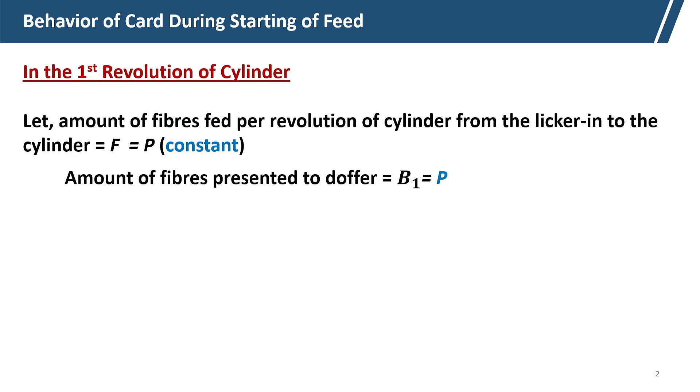Now, the amount of fiber transferred to the doffer in the first cycle, denoted by C1, is definitely lower than B1 or P, by the factor gamma. So B1 multiplied by gamma is the amount of fiber transferred to the doffer, and gamma is called the transfer coefficient, and gamma is always less than 1 - 100% of the fiber will not get transmitted. So it is equal to P gamma.

Now, gamma is the transfer coefficient, and the amount of fiber retained by the cylinder is B dash 1 in the first cycle. So this is the fiber coming, P fiber is coming, the doffer is taking P gamma, and the remaining fiber, P minus P gamma, is B dash 1. This fiber is actually retained by the cylinder.

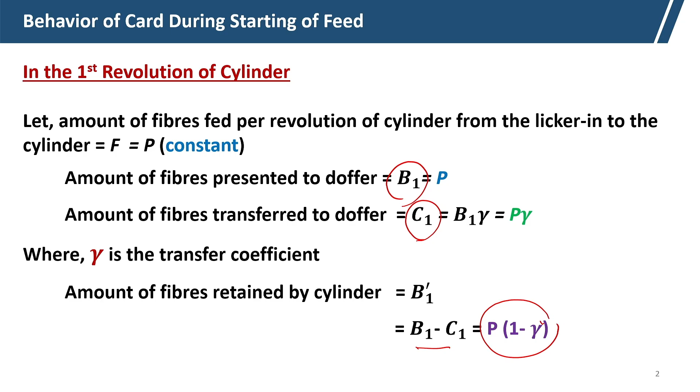Now coming to the next revolution. In the second revolution of the cylinder, what happens? In addition, the additional P is coming to the cylinder, because the production rate is P, and the retained fiber is there, B dash 1, from the first cycle. This will be added and again presented to the doffer.

So we can predict the third revolution. Let us see what we are getting there. In addition to P, the retained fiber from the second revolution, that is B dash 2, will also be presented to the doffer. So this fiber will be again presented to the doffer, and what we will be getting? So we will just add P plus B dash 2. So B dash 2, we have got this from the earlier relationship.

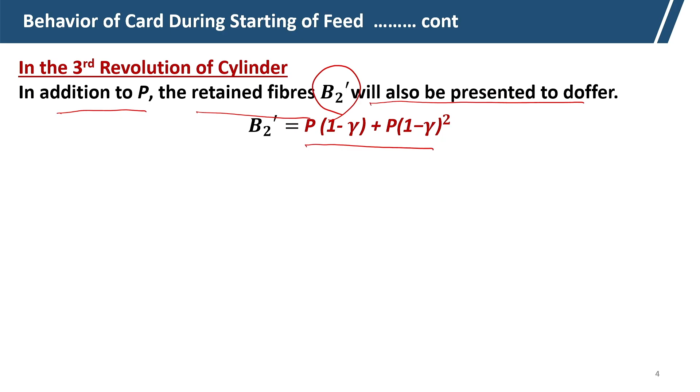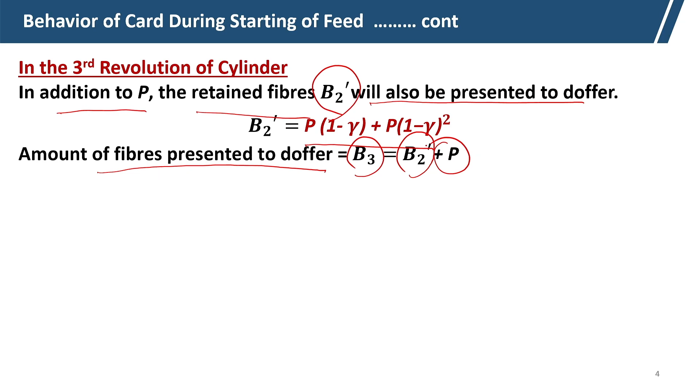If we get this, the amount of fibers presented to the doffer is B3, which is B dash 2 plus P. So this total fiber B3 is presented to the doffer. Let us get this: P plus this B dash 2. So these fibers are presented.

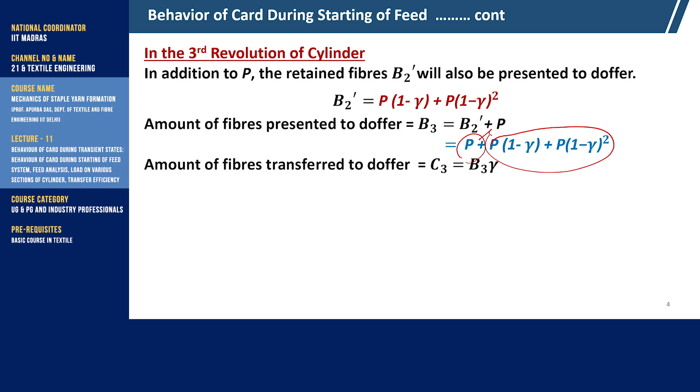Now the amount of fibers transferred to the doffer, which is C3, is nothing but B3 multiplied by gamma. Again, if we multiply this with gamma, we get this equation, P gamma, multiplying every part with gamma, and by rearranging, what we are getting is P multiplied by 1 minus 1 minus gamma whole cube. This is the relationship we get for the third revolution.

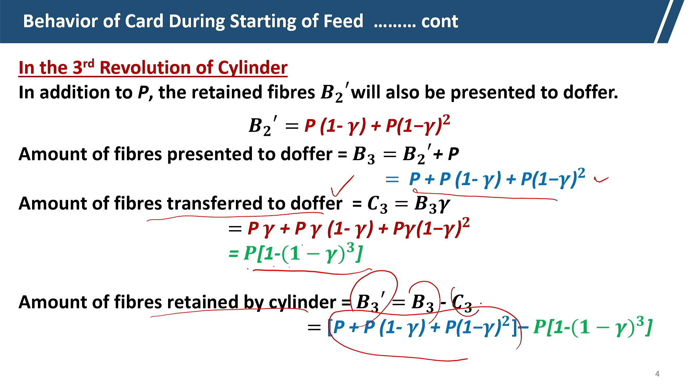So, this fiber is transferred to the doffer. Now, what we are getting, the fibers remaining in the cylinder at the third revolution will be B3 minus C3. B3 is presented and C3 fiber is taken away. So, B3 minus C3 will be this B3 and this one is C3.

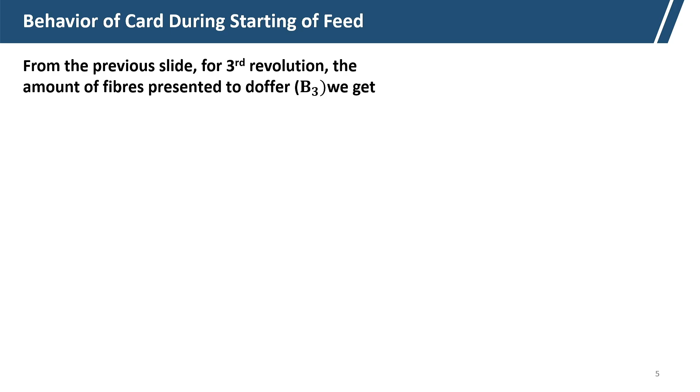So now we get, from the previous slide, the third revolution, the amount of fibers present to the doffer B3, we get this.

And now, for the generalized equation for the nth revolution, the amount of fibers presented to the doffer, that is Bn. So for the third revolution it is B3, so for nth revolution it is Bn.

Now, we can get the relationship here. Bn will be P plus 1 minus gamma, P plus 1 minus gamma squared. This series will continue, and ultimately it will be n minus 1. So for the third cycle it is n3 minus 1, up to 3 minus 1. So the power will be n minus 1, so here it is n minus 1.

So this is the generalized form for the fibers presented to the doffer at the nth cycle, because now the saturation is not reached. So during saturation time it is there, and when the saturation is reached, that means Bn will be equal to Bn minus 1. At that condition the saturation is reached.

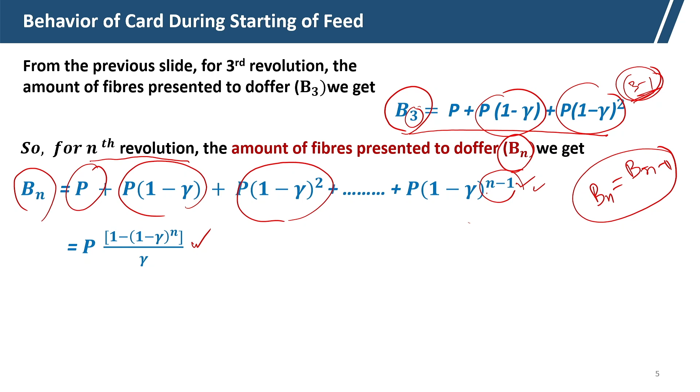Now, if we add this series, using this series we will get this value: P multiplied by 1 minus gamma to the power n, divided by gamma. So this is the relationship we get for Bn, that is the amount of fiber presented during the starting after the nth revolution.

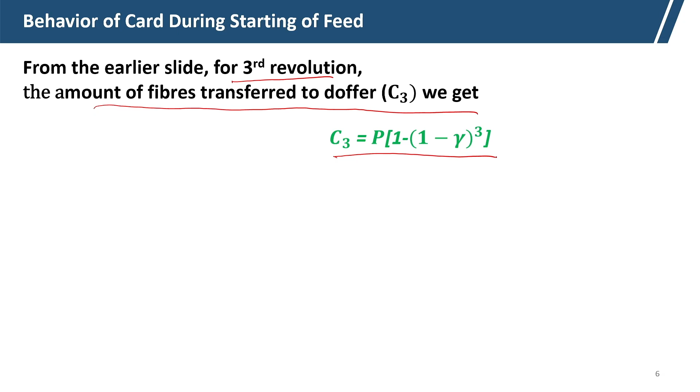And from the earlier slides of the third revolution, the amount of fibers transferred to the doffer, we are getting C3, amount of fiber transferred to the doffer, is P multiplied by 1 minus gamma cubed. So from that relationship we can calculate Cn also. So the amount of fibers transferred to the doffer, Cn, at the nth revolution we will get, so in place of 3 we can use n here, so Cn is there.

So, amount of fiber presented to the doffer Bn is this, and amount of fiber presented... so for the nth revolution, amount of fibers transferred to the doffer will be P. So Bn multiplied by gamma, so P multiplied by 1 minus this. So amount of fibers presented to the doffer Bn, and amount of fiber transferred to the doffer, will be multiplied by gamma. This is the thing.

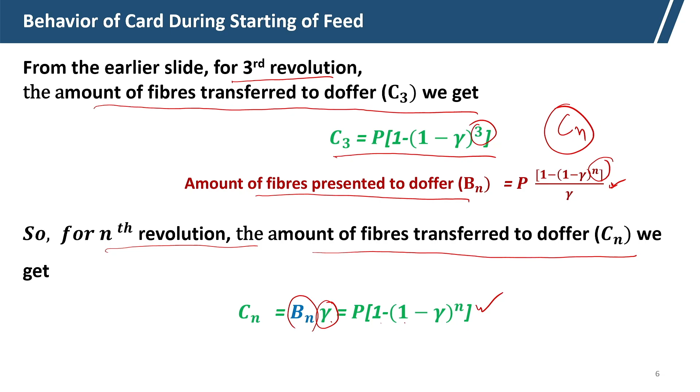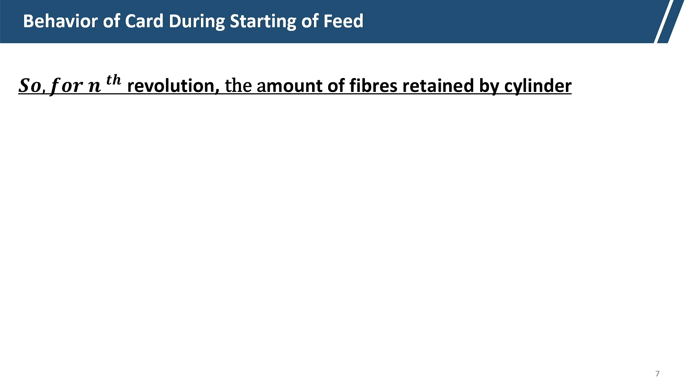Now, amount of fiber retained by the cylinder will be Bn minus Cn. So amount of fibers retained by the cylinder after the nth revolution, that we can see here. So Bn minus Cn, that is B-dash n, will be Bn minus Cn, this is Bn and here is Cn, this is the relationship. So at this condition, now we can simplify, rearranging this equation we get this equation, which is P multiplied by 1 minus gamma to the power n, multiplied by 1 by gamma minus 1. So just by rearranging this equation, we are getting the amount of fiber retained by the cylinder.

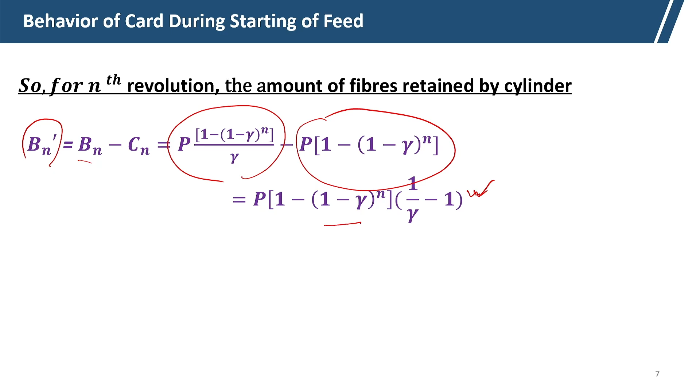So when do we get the steady state level? Steady state level, we get when n is very high, after a certain time. So let us assume n tends to infinity. So at that stage, it will get the steady state condition, n equal to infinity.

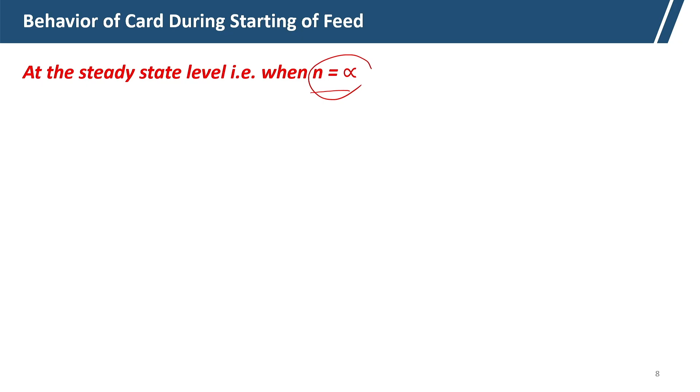So here for B infinite, that is amount of fiber presented to the doffer, B infinite, it will be equal to P into 1 minus 1 minus gamma to the power infinite. So ultimately we will find this becomes 1, this will become 0 because gamma is less than 1. So at that power infinite, this part will become 0, so ultimately this will be P by gamma.

So at that stage, that is the fiber presented to the doffer, and this is C infinite, that means C infinite is equal to C, that is the fiber taken by the doffer, that is fiber transferred to the doffer will be P by gamma multiplied by gamma. That is because C is B into gamma, so that is why it becomes P. That means, at the steady state condition, whatever fiber is fed is transferred to the doffer.

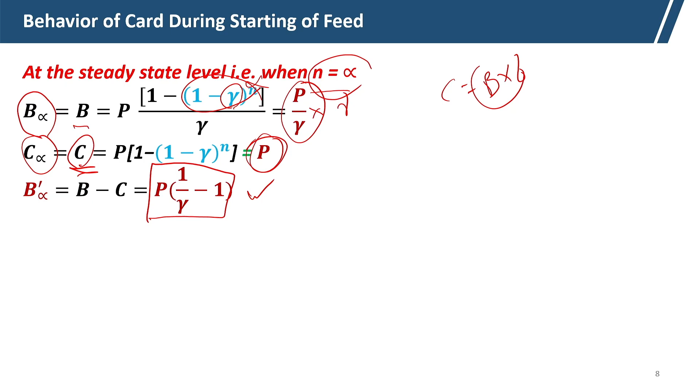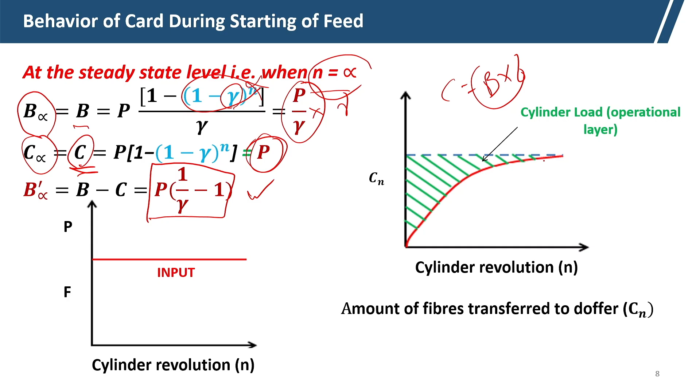So, the input of the cylinder revolution is constant which is P, and we can see the cylinder load gradually increases and it basically reaches a particular level. So, cylinder load in the operation layer gradually increases.

So, from there we can get the value of the cylinder load at any stage, at any number of this cylinder revolution. So, amount of fiber transferred to the doffer, Cn, is increasing with the cylinder revolution and it reaches the steady state condition. So, operation layer cylinder load is shown by the hatched line zone.

Now, in case of opposite, what happens when we stop the feed: cylinder is loaded and it is at steady state condition, suddenly we stop the feeding. Now, what will happen during that time? Because it is a transient state, as I mentioned initially when we start feeding it is transient state and loading increases, but when we stop feeding it is again transient state, but the cylinder loading gradually reduces.

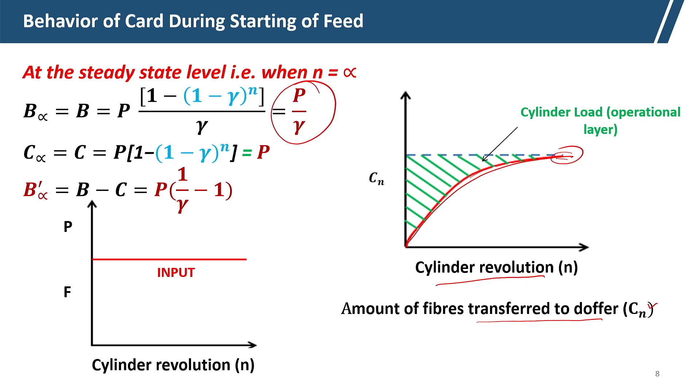Now, let us say for the first revolution again the quantity of material on the cylinder is P by gamma, same as we have seen in steady state condition. Initially, at the starting portion, the cylinder load was 0, there was no load, but here at the steady state condition, this is the cylinder load which is presented to the doffer, that is P by gamma, and that will actually continue. When you stop the feeding, the quantity of material on the cylinder is B equal to P by gamma.

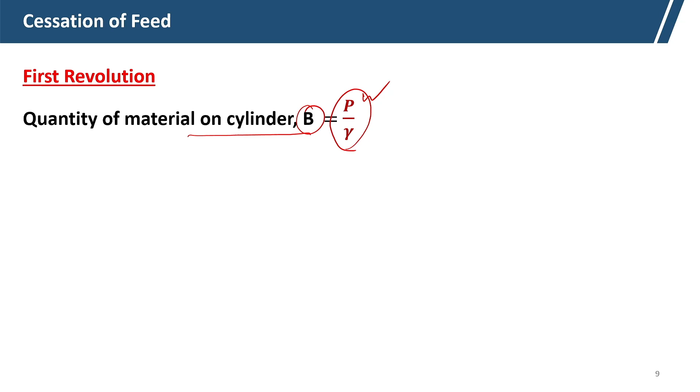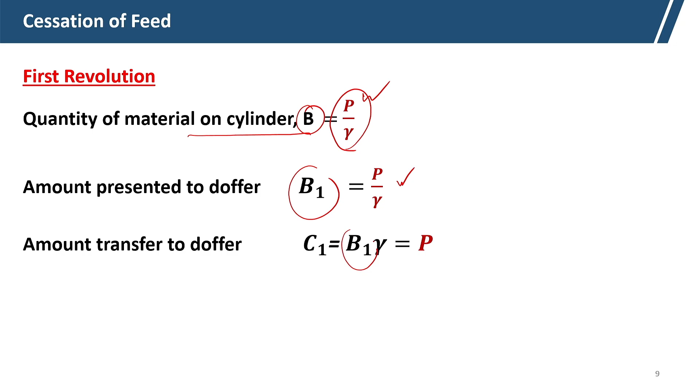Now, the amount of fibers presented to the doffer at the first revolution after the feed is stopped is the same, P by gamma. Now, the fibers which will be taken away by the doffer at the first revolution is equal to B1 into gamma, C1, which is nothing but P, and the amount of fibers retained by the cylinder will be B1 dash, B1 minus C1, as we have seen earlier. This is the first condition, first revolution after cessation.

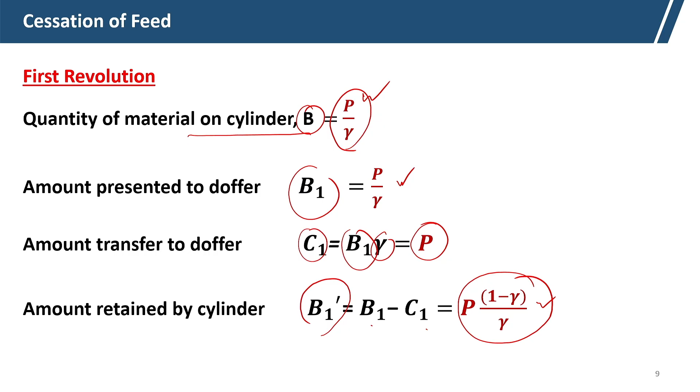Now, in the next cycle, what will happen? The cylinder will have this load only, because there is no additional feed. So, in the earlier case we kept on adding the P value. Here there is no additional fiber because the feed has been stopped.

For the second revolution, the amount of fiber presented to the doffer, B2, equals the amount of fibers retained in the first revolution, because there is no additional feed. So, it will remain the same. So, B2 and B1 dash will remain same.

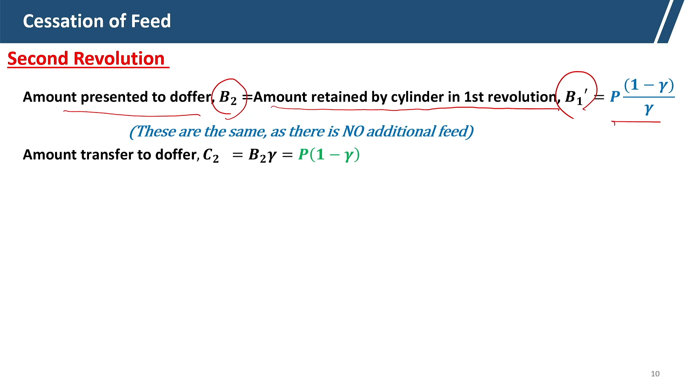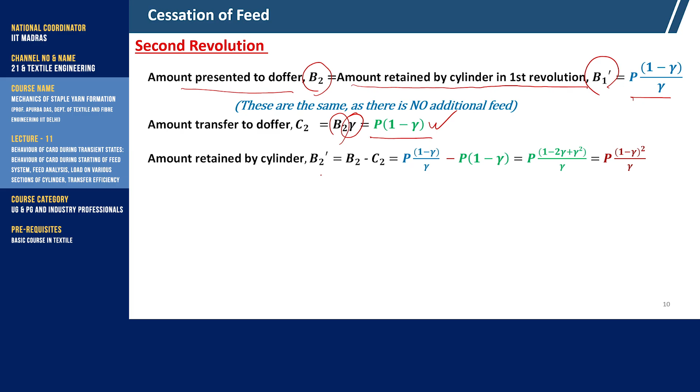So, the amount of fibers transferred to the doffer will be B2 multiplied by gamma, that is C2, and the amount of fibers retained by the cylinder, B2 dash, will be B2 minus C2. So, this is what we are getting.

So, we can just rearrange this equation, P multiplied by 1 minus gamma square, by gamma.

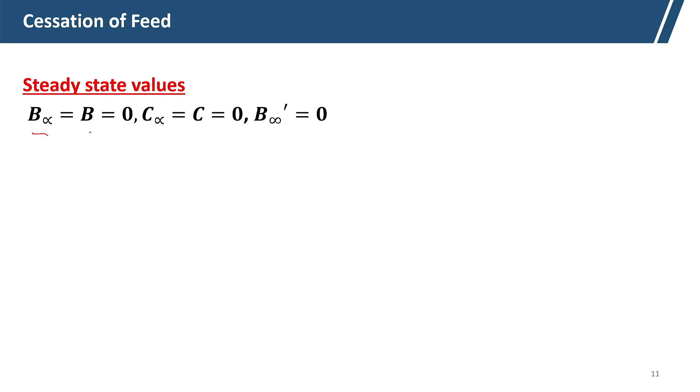And B dash infinity, so if we stop the machine and run it for a long time, the load on the cylinder will be 0, because the cylinder will be totally cleaned theoretically, and then there won't be any fiber transfer, this will also be 0. So that we can achieve, we can get from this equation.

So as the number of cycles increases, these values keep on reducing. In case at the starting point, the values keep on increasing; here the values keep on reducing.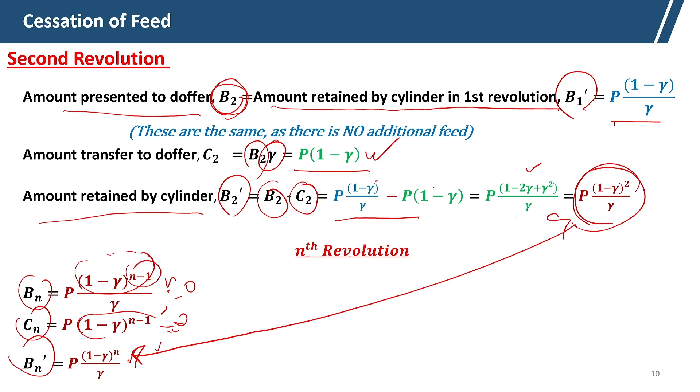We can see here, with the cylinder revolution at cessation, this is the production. We stopped the feeding, and gradually the cylinder load reduces and finally becomes 0.

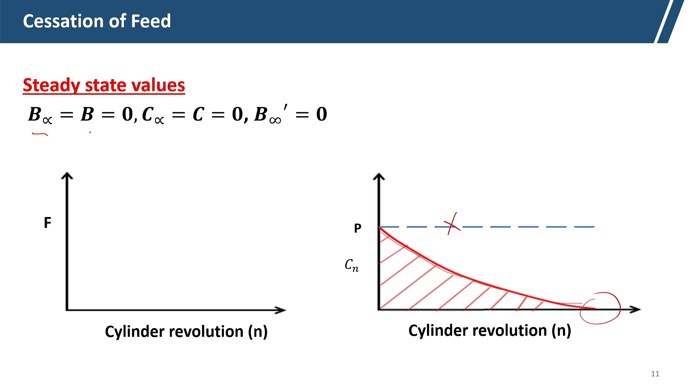Now we will discuss the cylinder load at different sections. Cylinder loading is very important, it affects the quality of the product, so we must know the cylinder loading at different total loading, and also at different sections. The cylinder is now divided into different sections.

We are dividing it into different segments. Now you can see here the cylinder is divided into different segments. This is the Licker-in, here is the Doffer. Between Doffer and flat, within the zone alpha 1, this is zone 1. In the carding zone between flat and cylinder, alpha 2 is the second zone.

Between the flat and Licker-in, this is zone 3. And in this zone, the remaining layer of fibers are there, which is within the cylinder. So Q2 is the fiber layer distributed over the entire periphery of the cylinder.

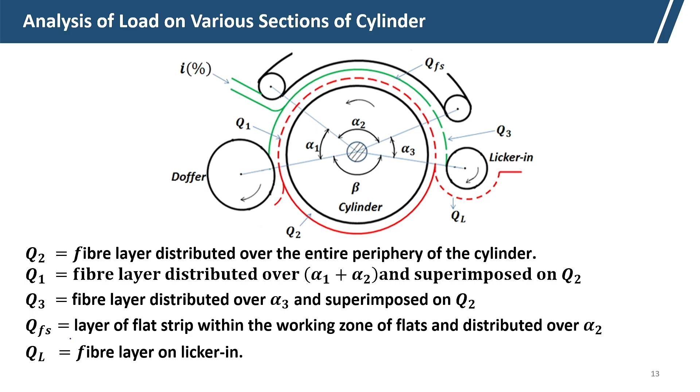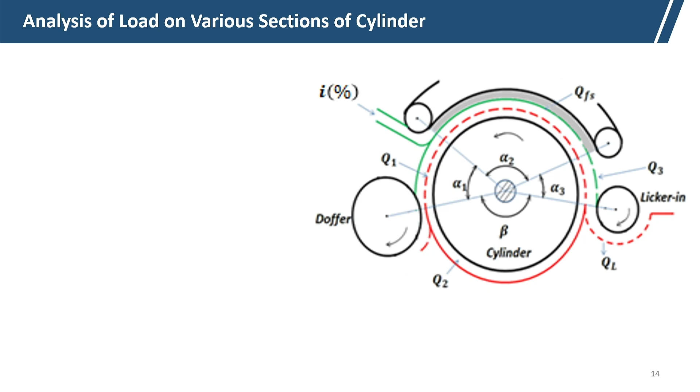Now, one by one we will do this. We will be interested in this first one, which is shown by the gray shading. So the area of interest is shown by the gray shading: weight of flat strip in the working zone, QFS, as we have. So this we will first calculate. Let us see what happens.

So radius of cylinder is RC, it is in meter. Now metric count of flat strip - here what is the metric count? It is in meter per gram; metric count is actually the indirect count. So meter per gram, it is NFS, metric count of the flat strip, that is the layer which we know - whatever fiber layer is there, that hank is NFS. If we know NFS, then the quantity we can calculate.

So quantity is that we know the cylinder radius and alpha 2 is the angle. So the total length - alpha 2 is the angle not in degrees, it is in radian. Alpha 2 multiplied by RC is the total length. If we know the length here, divided by the metric hank. So RC is given in meter. So RC multiplied by alpha 2 is the total length in meter, and if we divide this by NFS, that is the metric count of flat strip, we can calculate the total flat strip present.

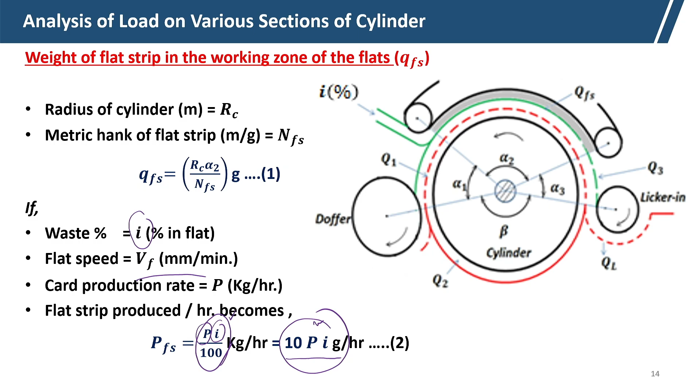Now, weight of flat strip in working zone is QFS. So we have seen the flat strip production is 10 P i gram per hour. So length of flat strip produced per hour - what is the length? So we know the flat speed, Vf is the flat speed, by 60 divided by 1000, so it should be meter per hour. Vf is the flat speed in millimeter per minute.

So from there we can calculate the flat length of flat strip, and using equation 2 and 3, we can calculate the hank of strip. So earlier the flat hank was unknown, but from the total flat strip and the flat speed, we can calculate the flat hank. So NFS can be calculated by 6 Vf divided by 1000 P i.

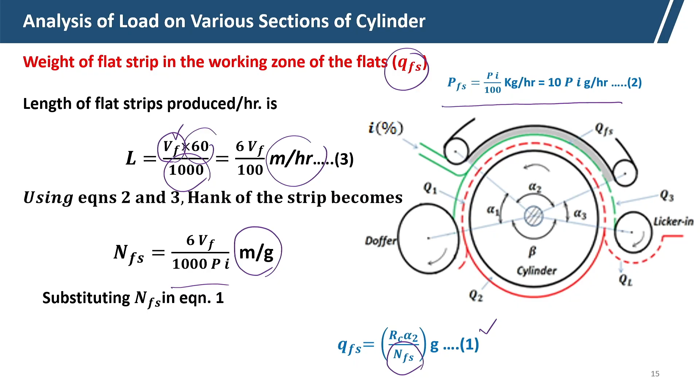So it is in meter per gram - meter per gram, that is the NFS. So this NFS we can use in the earlier equation, substituting this equation, and we get equation 1, where NFS was unknown. So NFS we can calculate from the production rate and speed of the flat and the flat strip.

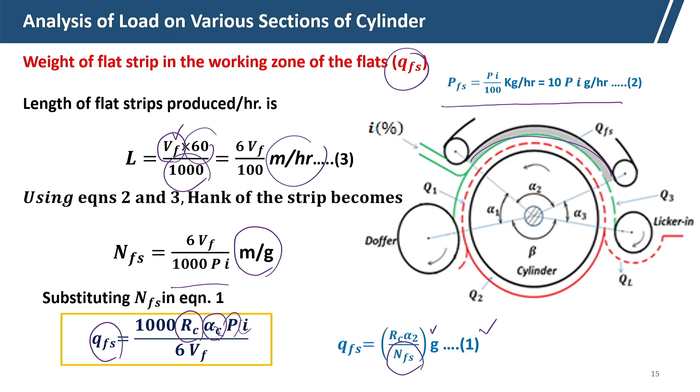So if we substitute this, we get the QFS value. QFS means the total flat strip load in the working zone will be - substituting, we get 1000, RC is the radius of the cylinder, alpha 2 will be the zone, and Pi divided by 6 Vf. That way we can calculate the flat load in the working zone. So here the flat metric hank was calculated from the flat strip and the production rate.

Now coming to the next zone, which is the weight of fiber layer on the cylinder section between flat and doffer. This zone is shown by the gray shaded zone. What is the weight of fiber in that zone? It is Q alpha 1.

What is Q alpha 1? That is RC multiplied by alpha 1 and N alpha 1. What is N alpha 1? N alpha 1 is the hank of fiber layer in that zone. RC alpha 1 is the arc length, where alpha 1 is the angle in radian and RC is the radius of the cylinder.

So we can calculate the arc length. Let the metric hank of the layer in layer Q1 be N1, and total layer N1 is the layer in that zone only, plus total layer. So N1 is Q1 plus Q2 layer, if we include Q2 layer which is inside throughout the cylinder zone. So Q1 plus Q2 will be N alpha 1, that is the metric count of the metric hank of this layer.

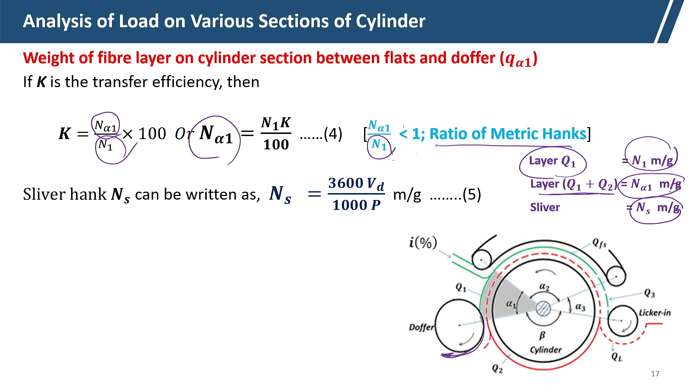So the sliver hank Ns can be written as 3600 Vd by 1000 into P. That is the sliver hank we can calculate from the production rate and delivery speed. Vd is the delivery speed of the doffer, and P is the rate of production in kg per hour, and from there we can rearrange this equation.

So this is in meters per minute. From there we can calculate that Vd is the surface speed of the doffer in meters per second, and P is the production rate in kg per hour. Ns can be written as N1 by Vd by Vc, or N1 equal to Ns into Vc by Vd. That way we can calculate the production rate and Ns and N1.

So weight of fiber layer on cylinder section between flat and doffer, Q1, is then obtained by substituting Ns from equation 5 and using equation 6. Using this, N1 we can calculate: N1 is equal to 3.6 by Vc by P. That is N1, which is the layer Q1, so this is the hank of layer Q1. We can calculate the hank of layer Q1.

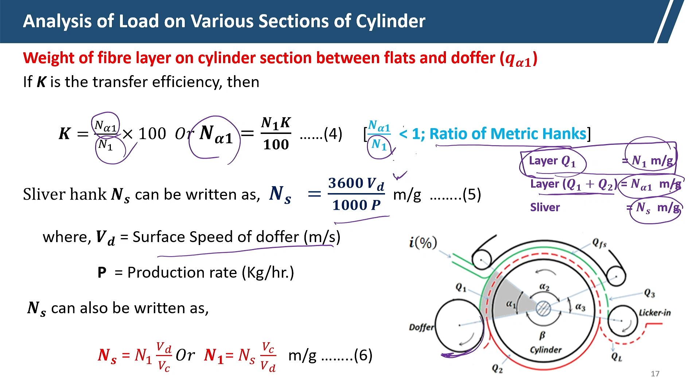From this N alpha 1, we can get N the Q, and from here we can calculate Q alpha 1. Q alpha 1 becomes 100 Rc alpha 1 P divided by 3.6 multiplied by Vc and K. So we can see Q alpha 1 from the earlier relationship. These are the relationships here, and we can get Q alpha 1.

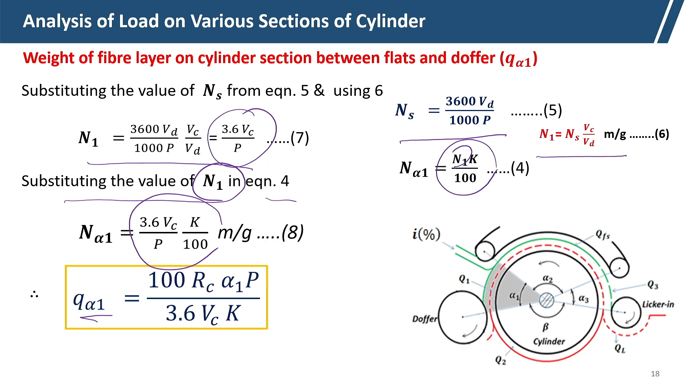So here RC is known, VC is known, K is known, K we can calculate. So everything is known, so we can calculate the quantity of fiber present in the zone alpha 1.

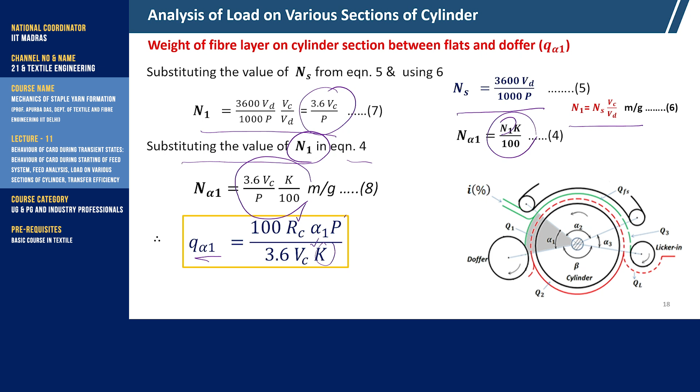Now we will see the quantity in the cylinder flat zone. So quantity of fiber layer on cylinder under flat zone, this is the area, and we will calculate in the similar way, exactly in the similar way. Here layer Q1 and Q2 are present on the section beside the fiber layer QFS. Q1 and Q2 are present beside the layer QFS. QFS we have already measured.

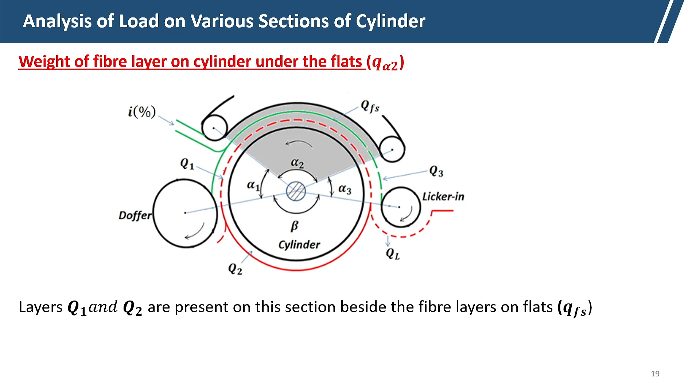So what we are interested in? We are interested in the fiber layer on the cylinder itself, now only on the cylinder. So combined hank of Q1 and Q2 becomes N alpha 1, which is equal to N alpha 2, because this fiber is coming here in this zone. N alpha 2 we have already measured. So N alpha 1 and N alpha 2 will be same, because this layer is coming to this alpha 1 zone, same between flat and doffer zone.

So N alpha 1 we have already calculated earlier. N alpha 1 is the metric count between this zone, which is equal to, so Q alpha 2 equal to RC alpha 2 by N alpha 1. So RC alpha 2 is this arc length, and arc length divided by the metric hank will give us the total weight of fiber.

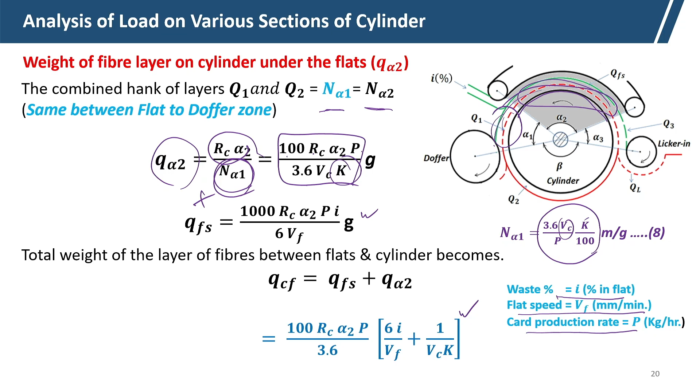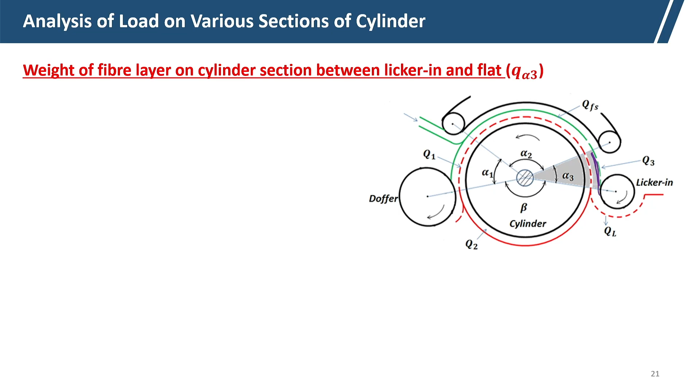Now coming to another zone, alpha 3, that is weight of fiber layer on the cylinder section between licker-in and flat. So between licker-in and flat in this section, what is the total load? We will proceed in exactly similar way. E is the licker-in waste, here the licker-in waste will be there, P is the production rate.

So we want to calculate the Q3 here. Nx is the metric hank of the lap. What is the lap hank we are calculating? And Y is the total waste of card. Vf is the feed roller speed in meter per second, and N3 is the metric hank of the layer passing from the licker-in to cylinder, that is N3.

So actual draft between the feed roller and cylinder becomes mechanical draft multiplied by 100 by 100 minus waste percent. So E is the waste percent, and mechanical draft, what is mechanical draft? Cylinder's surface speed by feed roller surface speed. This is the mechanical draft. So actual draft we can calculate if we know the waste percent.

So hank of layer Q3, what is the layer Q3 hank? Metric hank of lap is known, and if we know the actual draft, if we multiply by actual draft, we get the hank at Q3. So lap is there and hank after waste percent, whatever licker-in waste percent, we get the hank here Q3. So N3 is the hank, it is in meter per gram, metric hank.

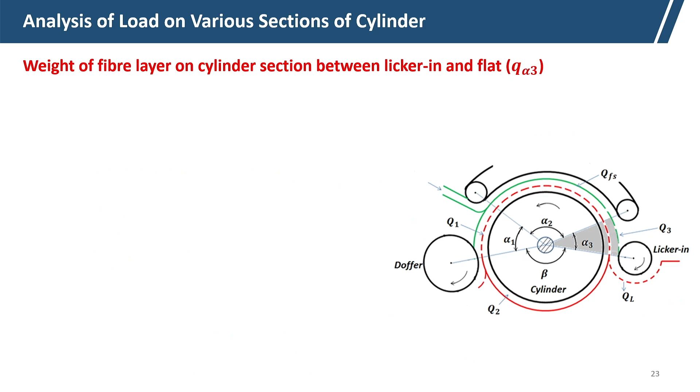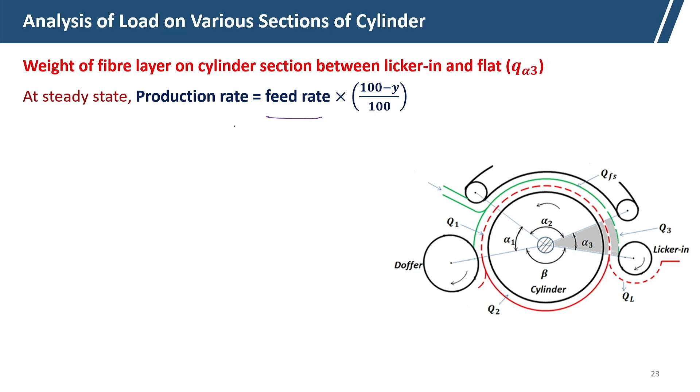Weight of fiber layer on the cylinder section between these zones means total weight will be there. So at steady state, production rate equals feed rate multiplied by 100 minus y by 100, where y is the waste percent and Nx is the metric hank.

So total waste percent of card, P is production rate, Vfr by 1000, this is the feed rate, and here is the equation, where feed speed Nx is the metric hank of the lap.

From there we can calculate the production rate, and from Nx, the metric hank, we can rearrange this equation for the metric hank of the lap, substituting Nx in equation number 9 for N3. So N3 here we can get this by substituting Nx, referring to equation number 9.

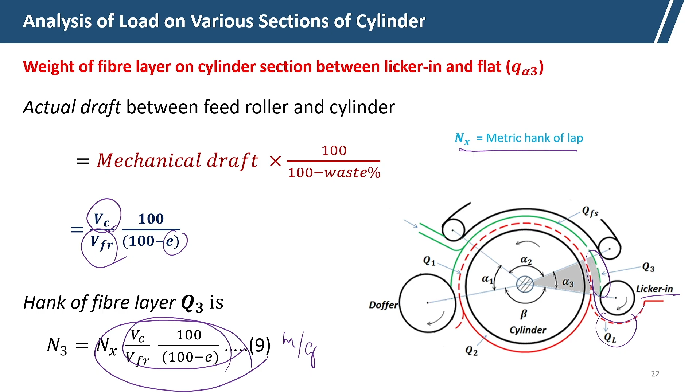So we can substitute Nx here, and we get this equation. This is the Nx value.

From there we are getting N3, which is the metric hank at this zone. So N3 equals Nx multiplied by this. Nx is actually getting transferred and substituted. Thus rearranging this equation, we get N3 equal to 3.6 multiplied by 100 minus y, multiplied by Vc, divided by P multiplied by 100 minus E.

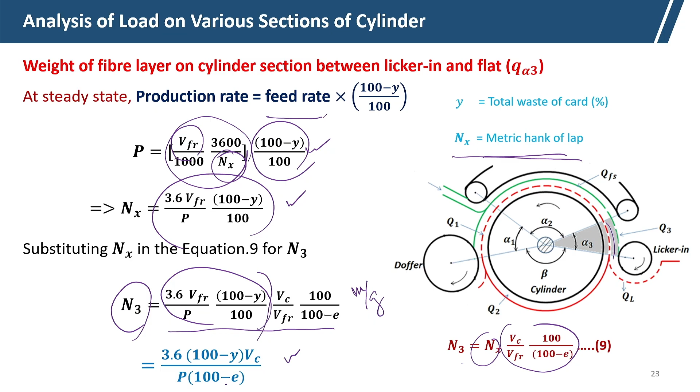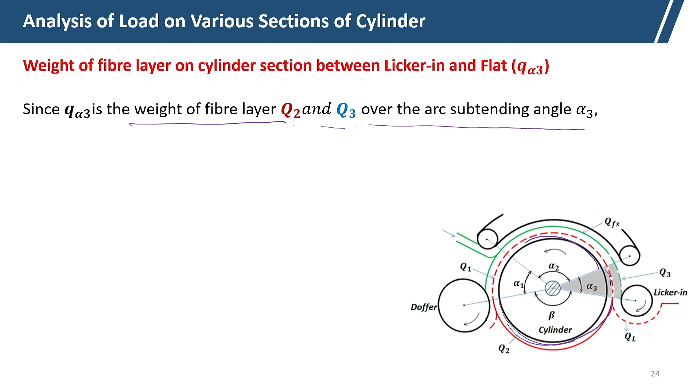That is the metric hank of the zone N3, fiber layer between licker-in and flat. Since Q alpha 3 is the weight of fiber layer in Q2 and Q3, over the arc alpha 3, Q2 is there. This is the fiber layer here, Q2 and Q3 added together, so this will be totally added here. Q alpha 3 will be the total load on this zone, that is Q3 and Q2. We have already calculated Q2 and Q3.

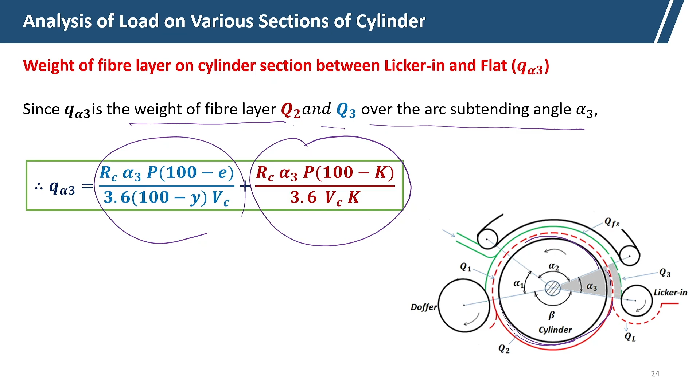So total fiber load at this zone is derived. So weight of fiber layer in cylinder section between doffer and licker-in is nothing but 1 minus 1 by n beta divided by 1 by n alpha 1 equal to 1 minus k by 100.

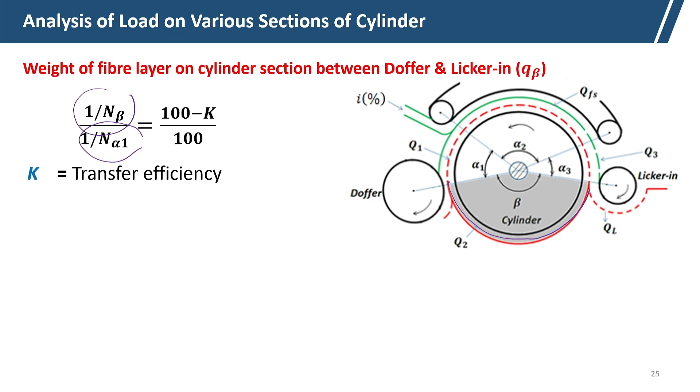K is the transfer coefficient and beta is this cylinder zone. So n beta is the metric count at zone beta under the cylinder, which is Q2, and material in alpha 1 zone is heavier than zone beta. The alpha 1 zone will be heavier because some portion of fibers are transferred to the doffer, so it will be lowered by factor k. So n beta equals n alpha 1 multiplied by this factor.

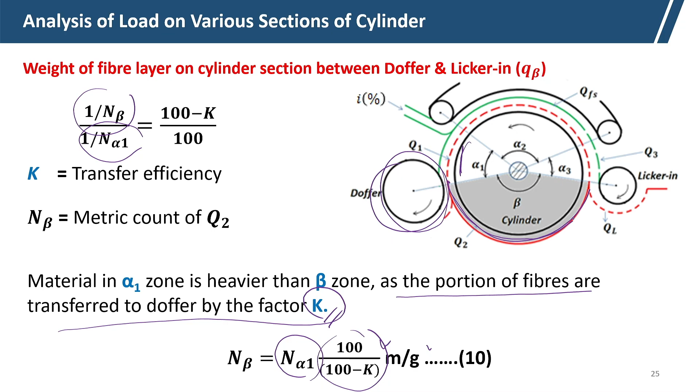So n alpha 1 zone, if we take into account the transfer coefficient, n beta can be calculated from n alpha 1, if we know the transfer coefficient in meters per gram. So equation number 10 gives n beta, which we have calculated. Everywhere we observe we must calculate the metric count first, then we can calculate the load easily by the arc length. So n beta is calculated, so we can calculate the load. This is n alpha 1 here.

So n alpha 1 is given, so from equations 8 and 10, equation 10 being n beta, we can calculate n beta, and then calculate the quantity of fiber in beta, which is the arc length RC into beta divided by n beta, the metric hank. This gives in grams the weight of fiber. So what we have done is calculate the total weight at different zones of fiber.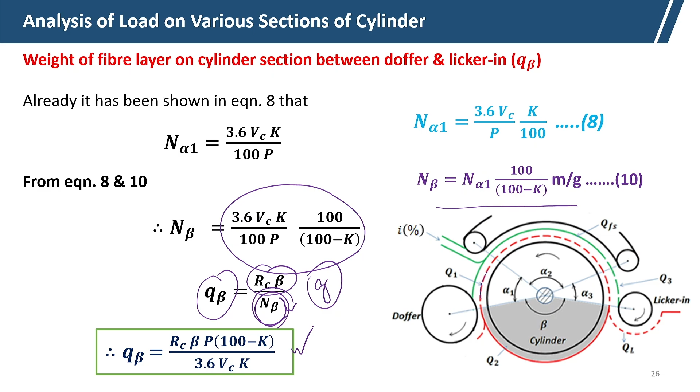So we can now calculate that if we add everything, we will get the total load on the carding zone. q beta, if we replace this in beta, we get the quantity of fiber in zone beta, defined as a percentage. Transfer efficiency is defined as the percentage of fiber transferred to the doffer from the cylinder per revolution of the cylinder, and mathematically K equals Q by Q multiplied by 100.

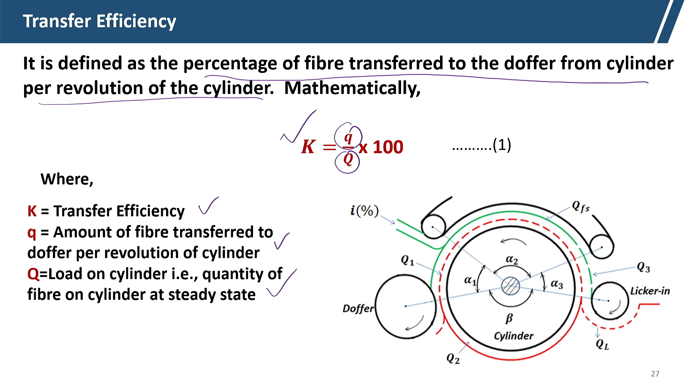q is the amount of fiber transferred to the doffer per revolution of the cylinder, K is the transfer efficiency, and Q is the load on the cylinder, that is the quantity of fiber on the cylinder in steady state condition. So we can calculate the fiber on the cylinder in steady state, and the amount of fiber transferred to the doffer per cylinder revolution, and from there we can calculate the transfer efficiency.

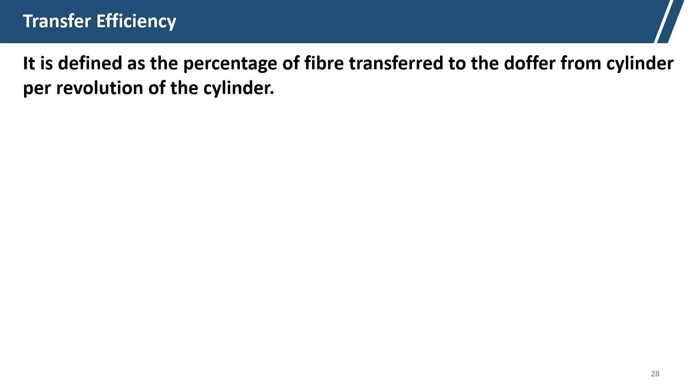It is defined as the percent of fiber transferred to the doffer from cylinder per revolution of cylinder. During one revolution of the cylinder, the length of sliver delivered by the doffer is 2 pi Rd, which is the doffer circumference, and Nd is the doffer RPM divided by Nc. So per revolution of cylinder, this much length of sliver is being fed and delivered by the doffer.

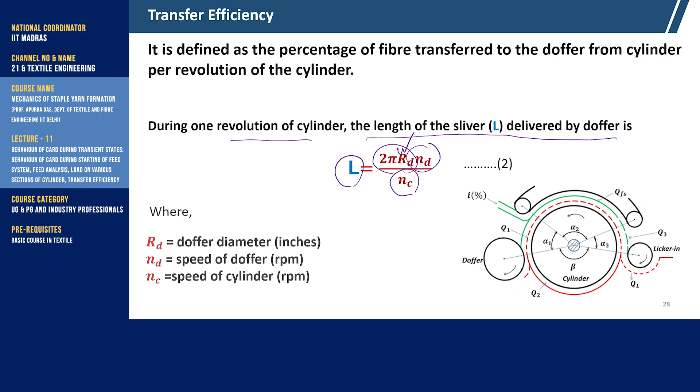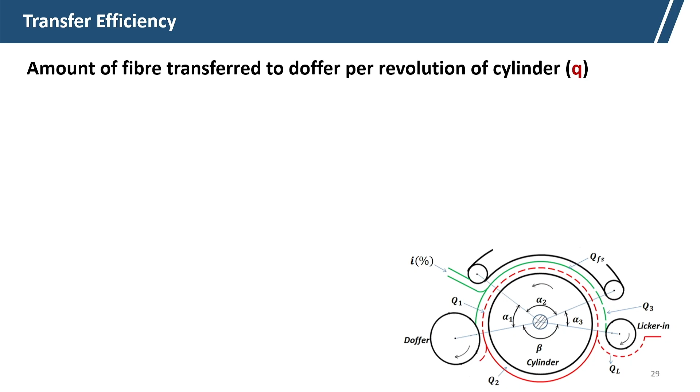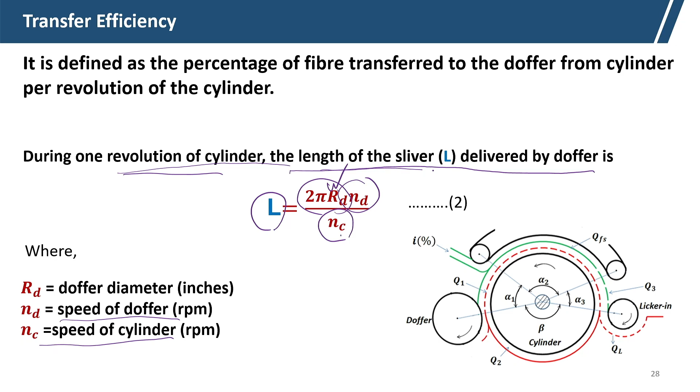So doffer speed, doffer RPM, and Nc is the cylinder RPM. Doffer RPM is much less than the cylinder RPM, as we know. So the amount of fiber transferred to the doffer per revolution - what we calculated earlier - in one revolution, the length of fiber transferred to the doffer is delivered by the doffer, and that amount of fiber is actually transferred.

So per revolution of the cylinder, its q can be calculated from L. L is the length of the sliver. So if we know the sliver hank and the length is known, from there we can calculate the total quantity.

You will see this factor comes to 36, which is the conversion from inches to yards, and 453.6 is the conversion from pounds to grams, with 840 yards. From there we get this equation, and L is replaced here by these values which we have already derived.

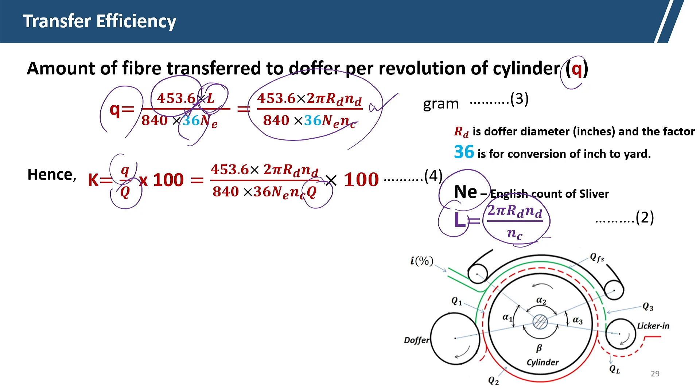Hence we can calculate the K value. K value is nothing but q by Q, where Q is the total load, which we have already calculated, so Q is known here. q is the amount of fiber transferred per revolution divided by the total load Q on the cylinder, multiplied by 100, giving the transfer efficiency. So we can calculate the transfer efficiency also.

If P is the production rate in grams per minute, then P can be calculated from the hank of the sliver. Knowing the sliver hank, the doffer radius, and the doffer RPM, the production P can be calculated.

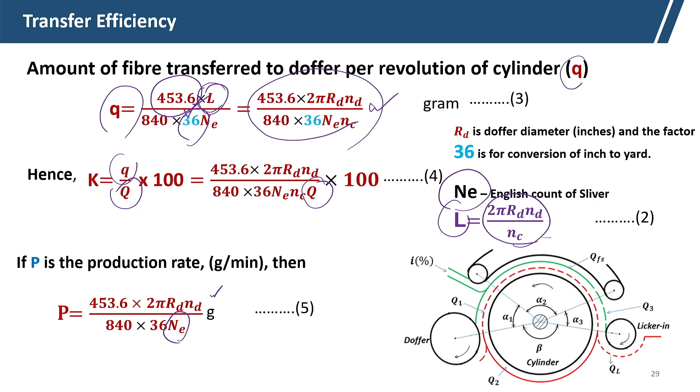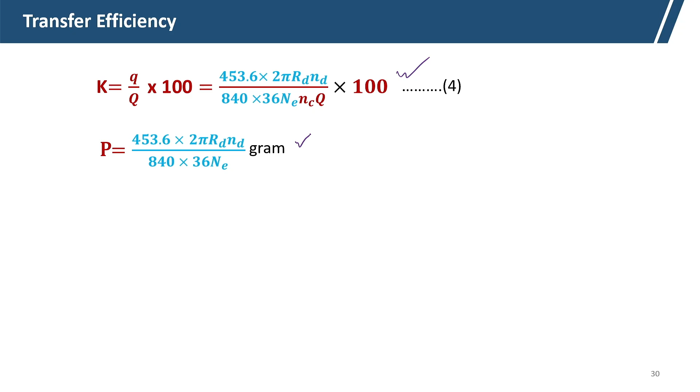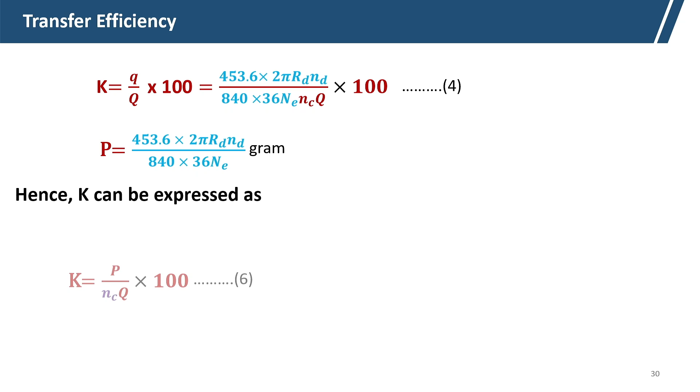And then the transfer coefficient, we know, is q by Q, and production is in grams here. Hence K can be expressed as P by Nc into Q, where Vc is the surface speed of the cylinder, and Nc is Vc by 2 pi Rc. From there we can calculate K equals 2 pi Rc multiplied by P, from this equation, equation 6, divided by Vc into Q. So K can be expressed as P by Nc into Q.

Surface speed of the cylinder equals 2 pi Rc multiplied by Nc, where Nc is the cylinder RPM, Q is the load, and Rc is the radius of the cylinder. So from there we can calculate K, the transfer efficiency: 2 pi Rc times P, the production, divided by Vc into Q, multiplied by 100. That is the transfer coefficient, related to the mass of fiber transferred to the doffer per revolution of the cylinder.

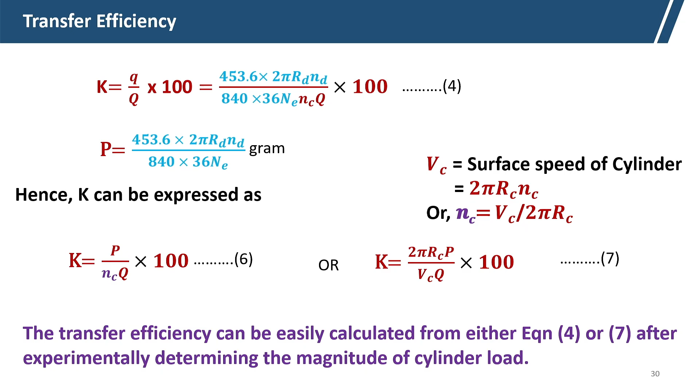The transfer efficiency can be easily calculated from equation number 4 or 7 after experimentally determining the magnitude of the cylinder load. So if we can calculate the total cylinder load Q, we can actually get the transfer efficiency. In laboratory experiments, we cannot calculate it theoretically, but we calculate the cylinder load experimentally, and then from there we can calculate the transfer efficiency.